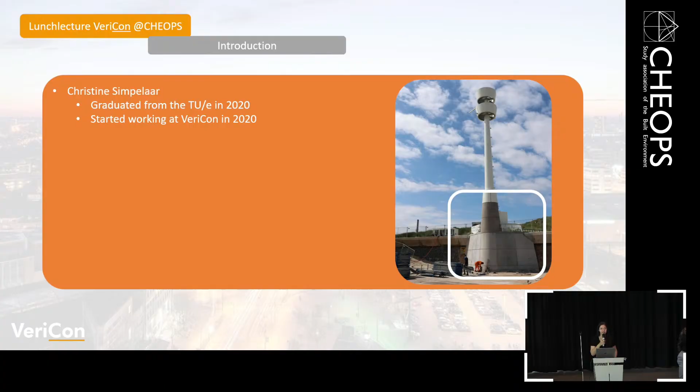Corona, so I couldn't travel or anything, so basically I just started working immediately. And I started working at VeriCon, and I've been there ever since. I work there as what we call a component structural engineer. I don't know if it's an actual term, but the English translation can

also prefab elements. So precast concrete elements, such as, for example, sandwich elements. In the last few years, I do more specials, like, for example, in the image on the right, you see a radar tower, and the base is from concrete, and that's one of the structures that we.

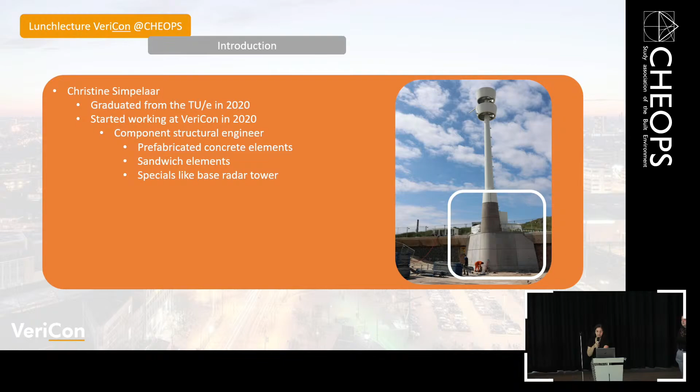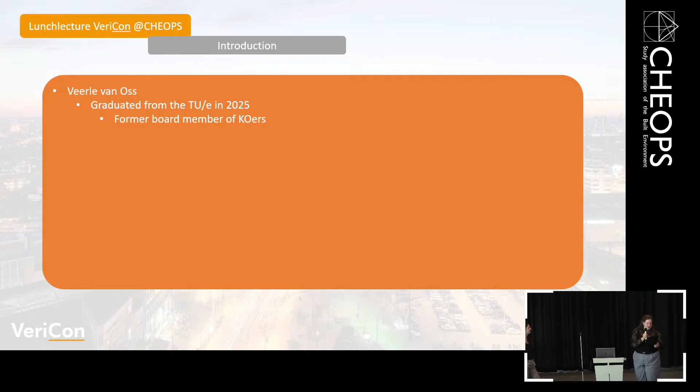Okay, hi everybody. I am Veerle. I recently graduated in October, and I was a board member of KOers last year. I started working at VeriCon in 2022 as a working student, and I made calculations for precast foundation beams 2 times a week. And when I graduated, I moved teams.

So right now I'm part of the design and consultancy team. And right now on the screen, there's one of the projects that I've been kind of working on. It's going to be a huge water hall where you can surf in Nijmegen. So it's been nice to do. But we will start with what we're here for, from design to reality.

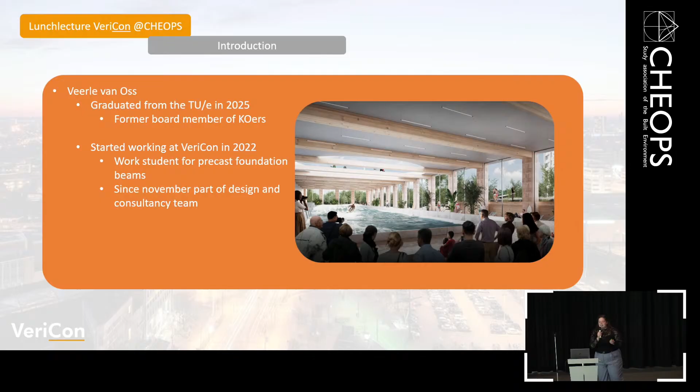Oh no, wait. I will introduce VeriCon a bit. We do design and consultancy as well as prefab engineering. There are 2 locations. We both work in Veldhoven, and we also have an office in Druten, which is near Nijmegen. There's about 90 of us, and all of us are either structural engineers or 3D engineers, so they make all our models. And everything is done in 3D.

So we are going to talk about Zijdekwartier in Arnhem. This is the entire plot. It's going to be a huge development near the hospital in Arnhem, and we are focusing mainly on the 2 blocks on the left, and the one that's highlighted is the southern cluster of the whole development. They're building it right now, and for the northern part we are still in the sketch designs.

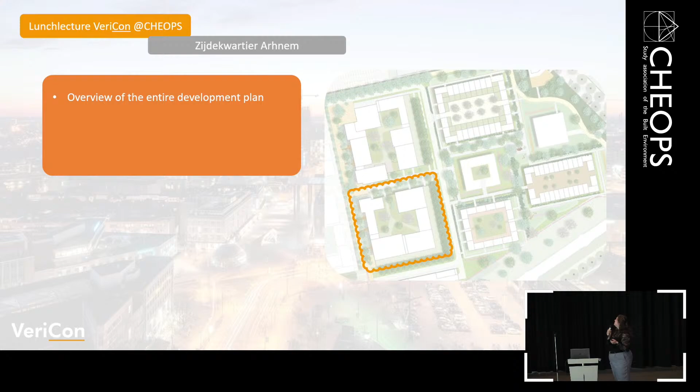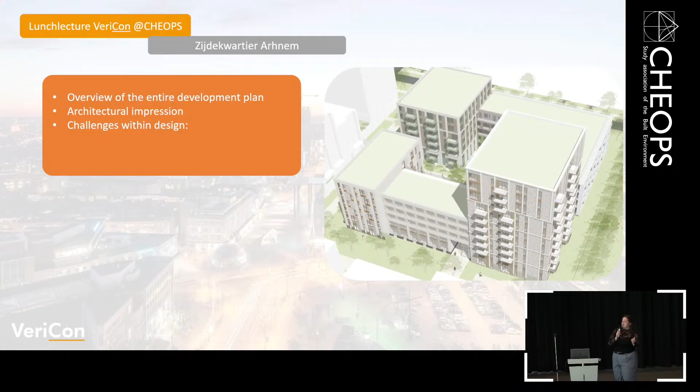This is how it's going to look. So it's a bit of a square where there's an inner yard and there's different layers for the buildings, different heights. There were actually quite some challenges with the designs, and one of them is that there were multiple architects involved throughout the entire project, but also within this quadrant, which makes settling things sometimes quite difficult,

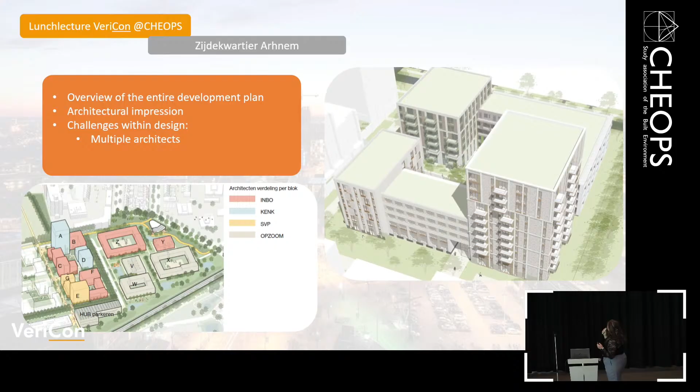especially if you have 2 different architects. One is working on the floor plans and the other one is working on the facade design, meaning that if you say you cannot put your balcony there to the one that's working on the inside of the building, the one that's making the design is like, but I want to have it there. It's not working. So those were difficult, as well as there's a lot of changes within the layout. It changes up quite a lot.

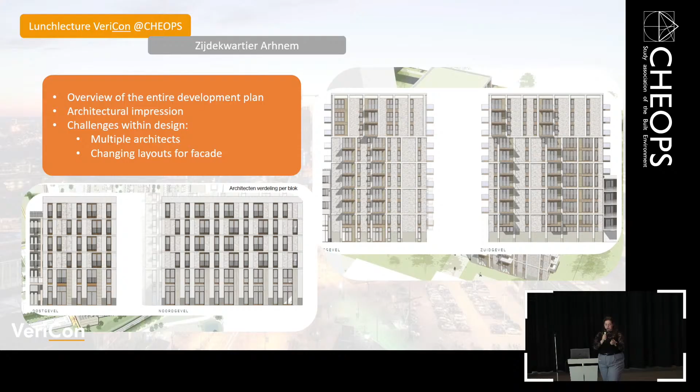Usually what we like as structural engineers, we like to have clear lines that go from the roof to the foundation, just one straight line. The architects wanted to play a bit with the facade, so those are all challenges within the entire design.

Then there are some first steps that we usually do when we get the designs from the architects, and one of them is deciding what type of load-bearing structure it's going to be. This was already decided on by the contractor, and they decided to do precast floors with load-bearing walls. So mainly our job was to figure out which load paths we were gonna keep.

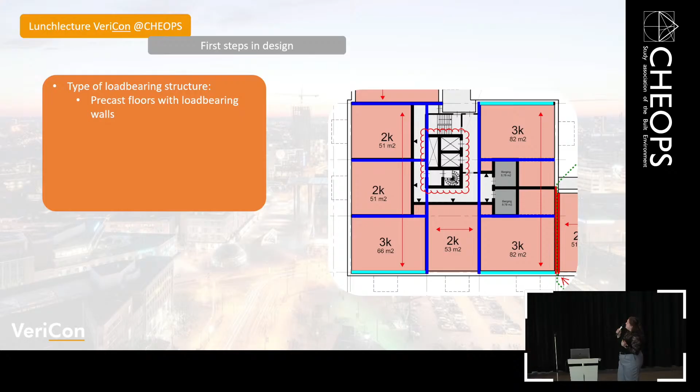We usually start a bit up higher, see which main room dividers are there. Those are indicated in blue, and these are going to be the main load-bearing walls. But if we go one floor down, we suddenly see that these walls do not continue on the ground floor, meaning that you either have to create columns or large beams, and it depends what the architect wants.

So we suggested if it's possible to add those walls back on the ground floor as well to create this direct load path. And when we have those walls, we already start making estimations of how many piles are needed underneath those walls, so the contractor has a feeling of how expensive everything is going to be.

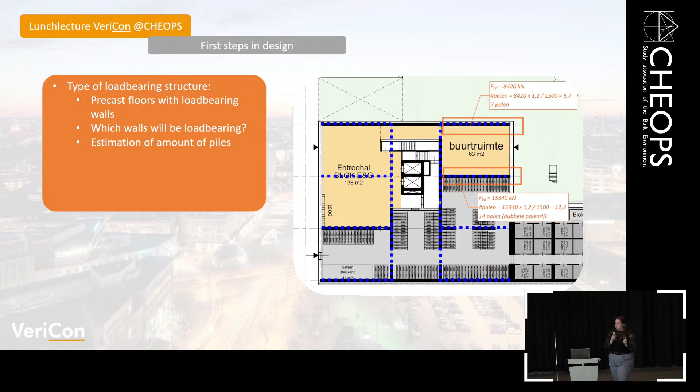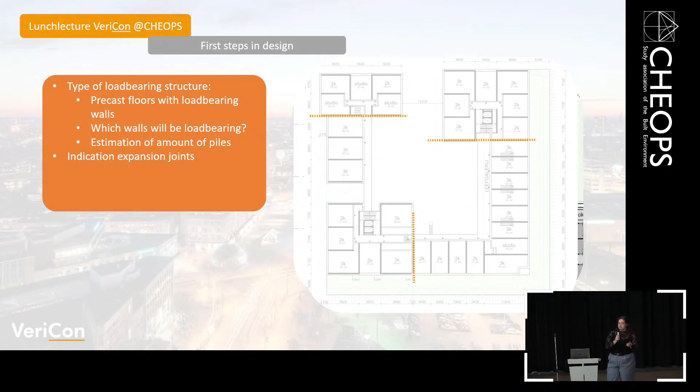Then, due to the size of the entire plot and everything being connected, expansion joints need to be added, meaning that the building architecturally is joined together. However, structurally there are 4 different components within the building. These were achieved by making double walls, so these components do not influence each other.

One of the other things we were looking at is, since it's an apartment complex, everybody wants some outside space. It's usually created with balconies. And there are 2 types of connections for balconies. One of them we call Isokorb, so you basically cast it in the floor as a connection, so it's a cantilever structure. The other way is creating connections with just steel columns and beams. And actually, in this case, both were going to be used.

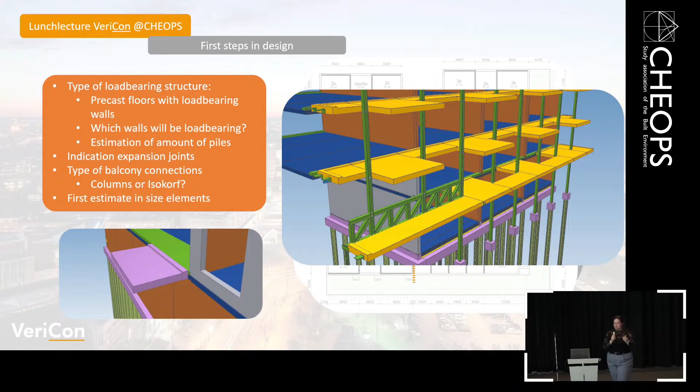Besides doing all of those things, we also start dimensioning already with rules of thumb or just very basic standard calculations. Once that's all done and everything is approved, we start with more detailed calculations. So this is the whole overview of the load-bearing structure. So it's quite a lot.

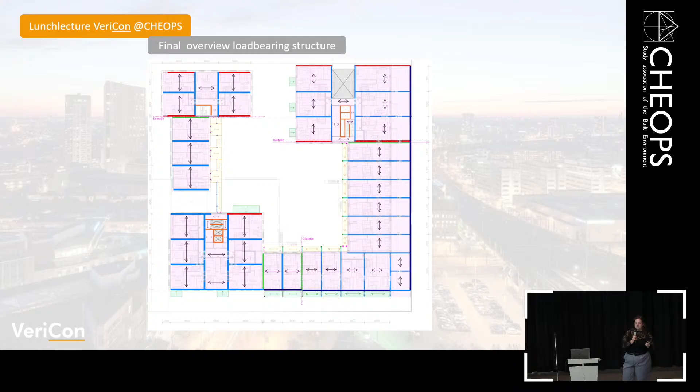You see that mainly all floors span in the same direction. That's just easier because then all important walls will be in the same line, and all load-bearing walls are actually dividing the apartments. So there's no load-bearing wall within your apartment.

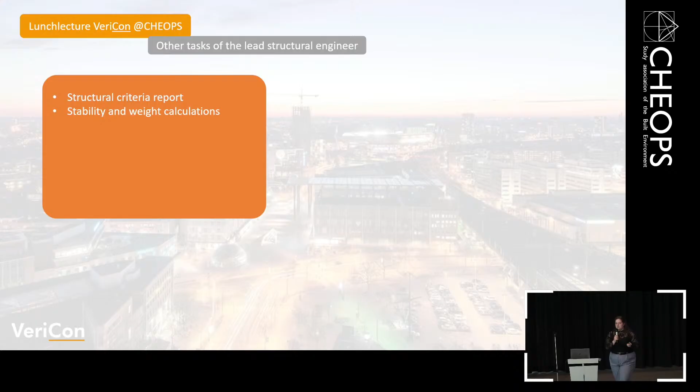Besides creating the overall design, as lead structural engineer we create a structural criteria report, which basically states the consequence class, load factors, and basic loads. After that, we make an entire stability and weight calculation to see the amount of weight, mainly for the foundation, and to see if the building is stable.

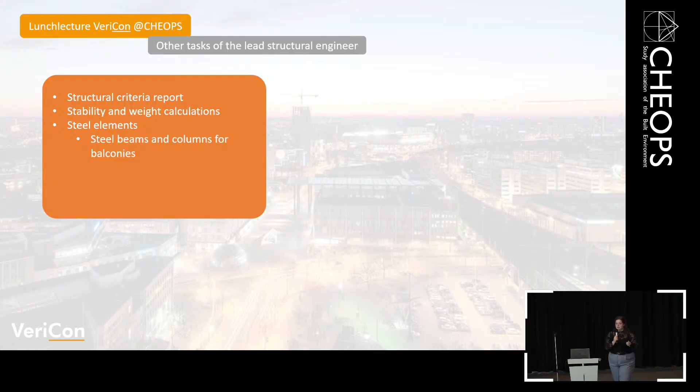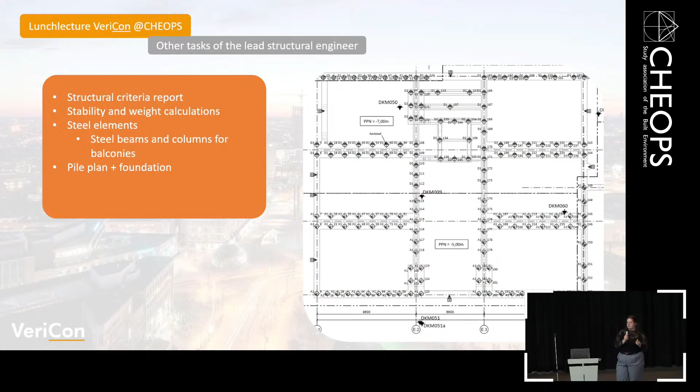We also engineered the steel elements, mainly the beams and columns for the balconies. And sometimes if there are large openings within the space itself, steel beams are needed. This is an example of one of the blocks of the pile plan. We also make that ourselves, based on the advice a geotechnical advisor gives on what depth the piles are going to need to be.

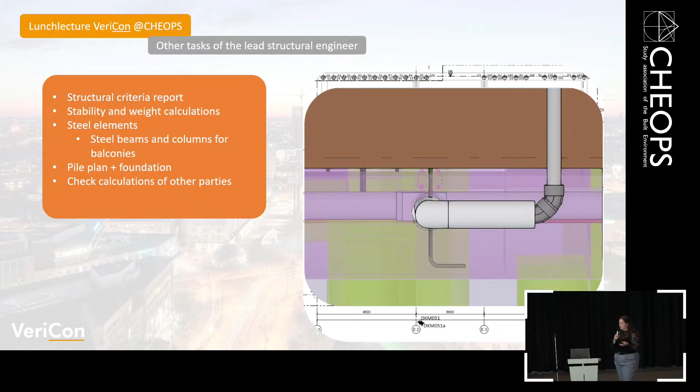We also get pieces from other parties, one of them being the plumbing for the entire building. Usually the plumbing goes through the foundation beams. We check for clashes. For example, for the walls we needed to use reinforcement that sticks out of the beam and goes into the wall. However, one of the plumbing elements is going straight through it. So we had to say, you need to move it, and if that's not possible, we need to see if we can move the reinforcement.

Depending on the project, we also go on site to check everything. I recently went quite a few times to check the reinforcement of the foundation, which you see in the picture on the right. There are sometimes mistakes made. Here, before casting the bottom part, they forgot the extra reinforcement needed for the walls. So we had to figure out ways to still put it in.

The last time I went, they were laying the ground floor with hollow core slabs, which is the picture on the left. So it's really nice to see how what you've been calculating actually works out. Now I'm going to give Christine the word back. She's going to talk about the precast elements and more BIM stuff.

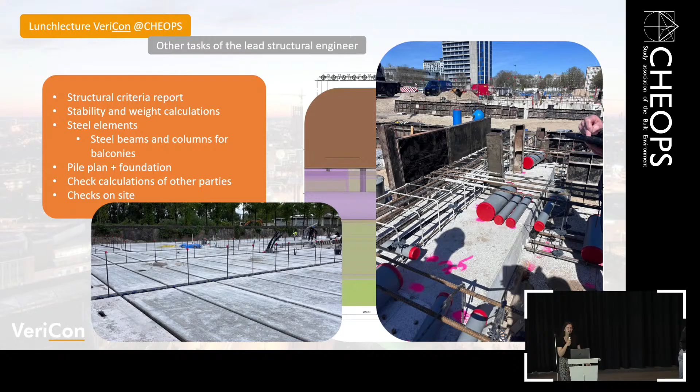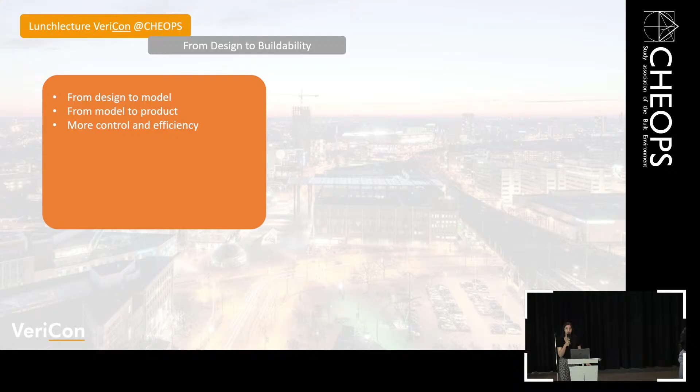Yes, so Vera has talked mainly about the main structure and architecturally, but from these structures and architectural drawings, we need to make designs. So in this image you see a 3D model, the architectural 3D model of one of the blocks. This is specifically block E. This model contains all kinds of information, from the type of brickwork, including every tiny electrical outlet in the building.

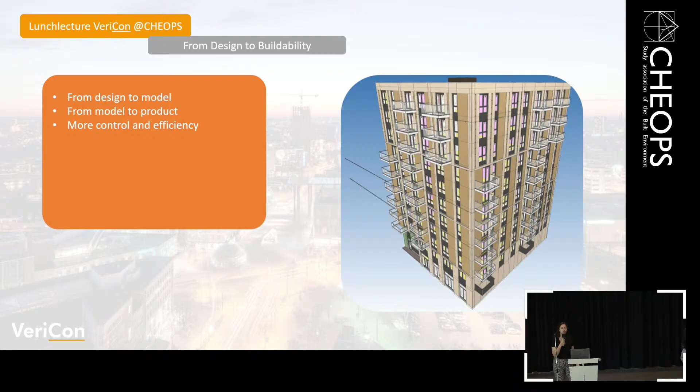And from this model, we need to go to products, because in this specific case, there's lots of prefab elements. VeriCon itself also specializes in prefab systems, one of our specializations. And to get to a final product, which is made in a factory, we need to go through a whole process. The benefits of these prefab elements is, of course, you have more control and it's efficient. So how do we get from these BIM models to the prefab structure?

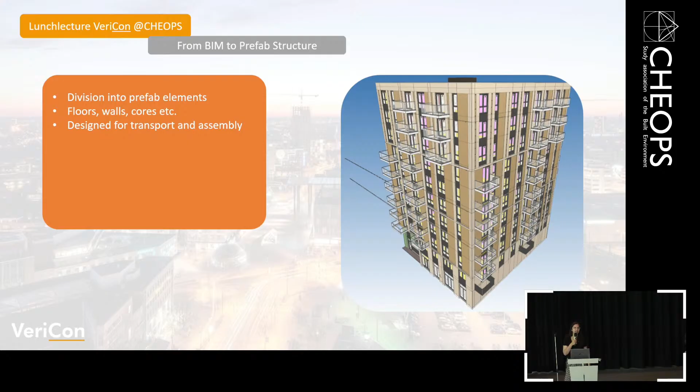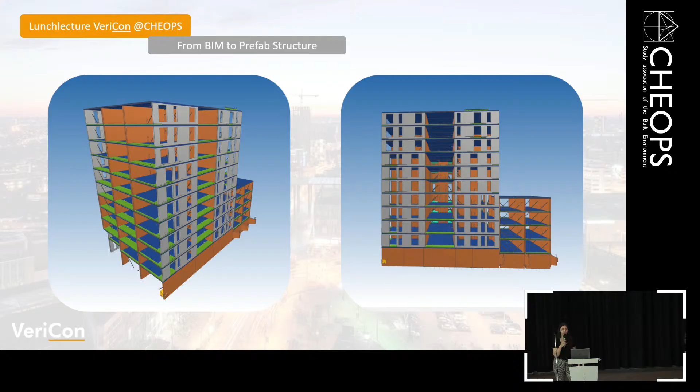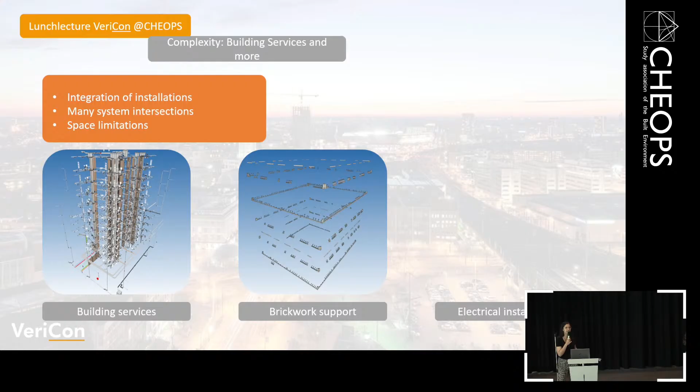Globally, when you look at it, the elements look quite, I don't want to say simple, but simple, like straight lines. However, once you start zooming in on what's happening on detail level, you'll see it's more complex than just these walls that go up. So, for example, this is the BIM model of all the building services in this building. Next to that, you also have a model for, in this case, the brickwork, and also a model for all the electrical installations. There's even more models, but I won't show you all of them.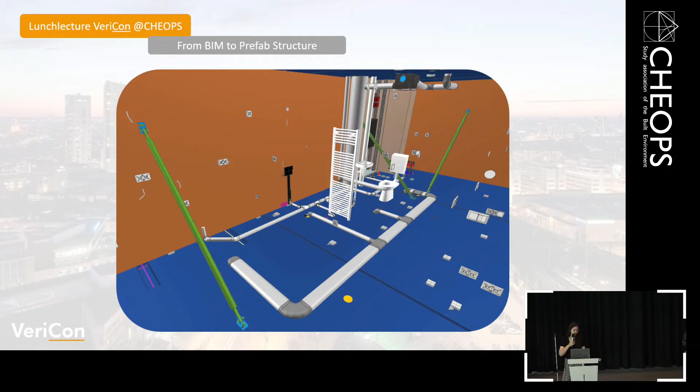These already have to be modeled because a factory needs to take into account where the holes will be, and our 3D engineers will model all of these outlets, as tiny as they may be, inside the model, and there's not a lot of tolerance. So 2 centimeters is already quite a lot in a prefab, but it's all very detailed, and there's not a lot of room for error.

So, for example, another clash that we ran into in this project: what you see is two floor slabs coming together, and underneath this section there's a load-bearing wall. The wall was not thick enough for both of the slabs to just be put on top of this wall, so that's why there's this shape which allows both floors to actually be put on top of the wall.

However, in the same location, there were also a lot of ventilation channels, as you can see on the image on the right. So we call them, asking, hey, what's possible? Can you maybe move them a little? They might say, yes, we can. But then you'll also have an architect that says, no, we can't, because then it will maybe become visible. And this process takes quite some time. Everyone has their own problems, and together you need to get to a solution.

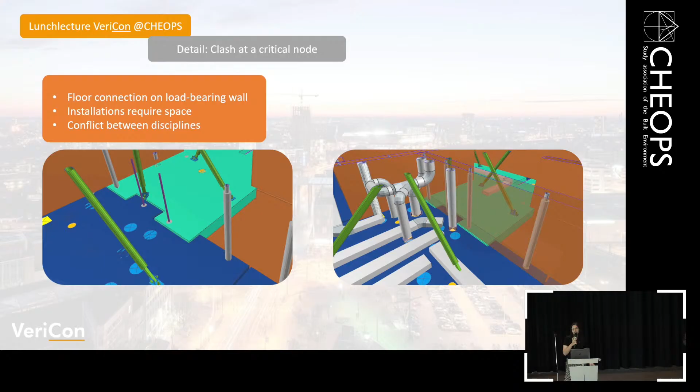In this case, I think we were able to move the holes, which are the blue holes you see in the floor, or at least away from this part of the support, because that was a critical structural element. And through this whole process, these are all the kind of problems you run into. So the solution is in the detailing.

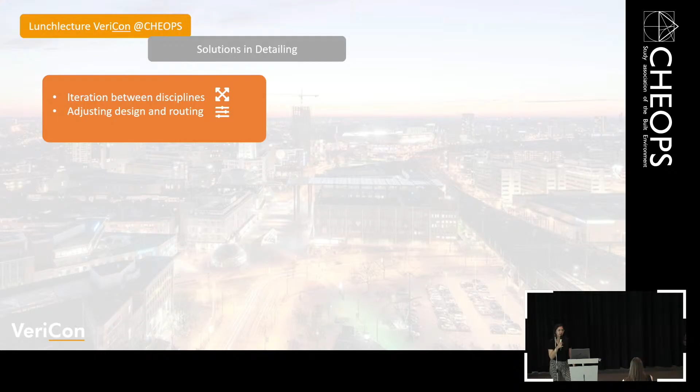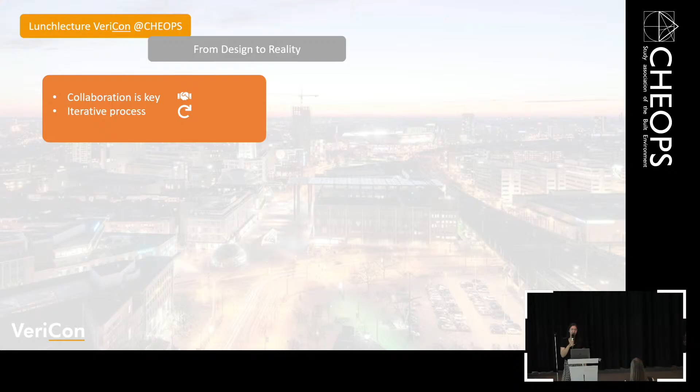Getting from a design to an actual building that can be made, and its smaller elements, there's a lot of iteration. It takes a lot of time. You need to discuss with people. You need to be able to understand each other and together come to a solution. So yeah, collaboration is key, and it's a long and iterative process, but in the end you'll get a building that can be made and where hopefully all parties are happy with the solution.